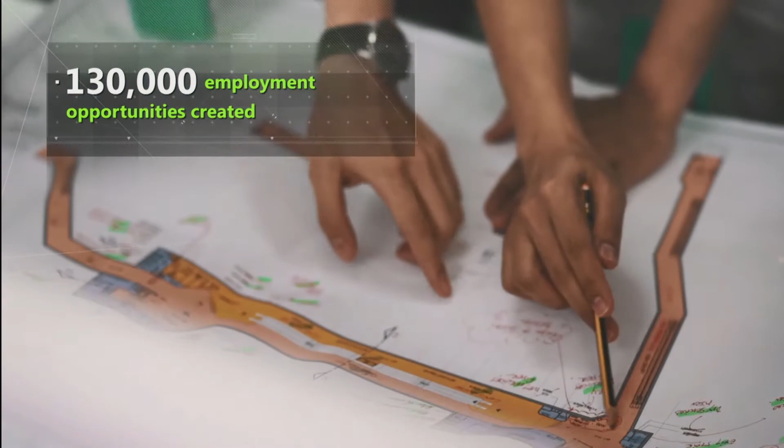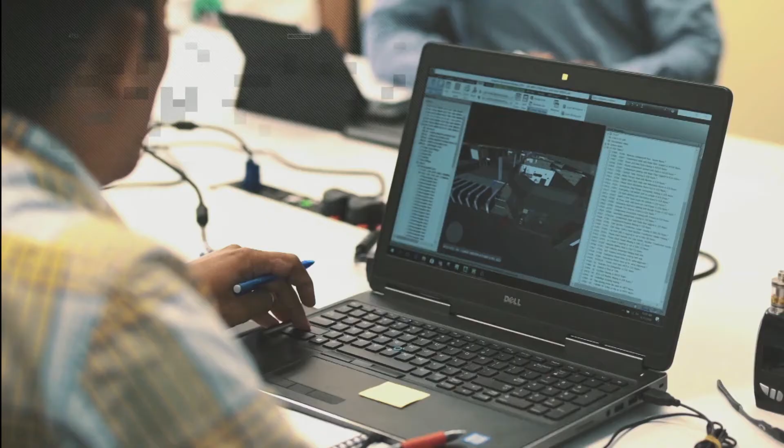The KV MRT system is providing a major boost in the integration and efficiency of urban public transport. The country's largest infrastructure project is already having a significant economic impact in Malaysia and within the region. As the first metro project in Asia Pacific to ensure greater collaboration and efficiency across teams with building information modelling, or BIM, methodologies, the SSP line is expected to be delivered on schedule and on budget.

Taking advantage of digital technologies for its SSP line, MRTC is improving connectivity for local and regional businesses, expanding workforce skills, attracting international investment, and increasing property values across the Klang Valley region. Digital transformation is helping transform the lives of millions of Malaysians today in preparation for a better tomorrow.

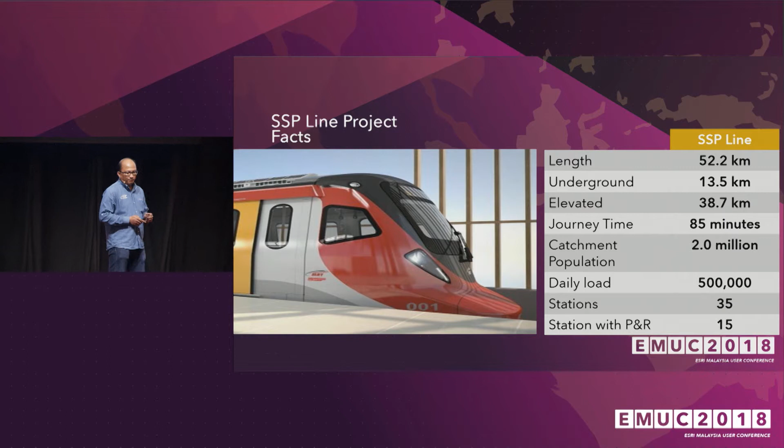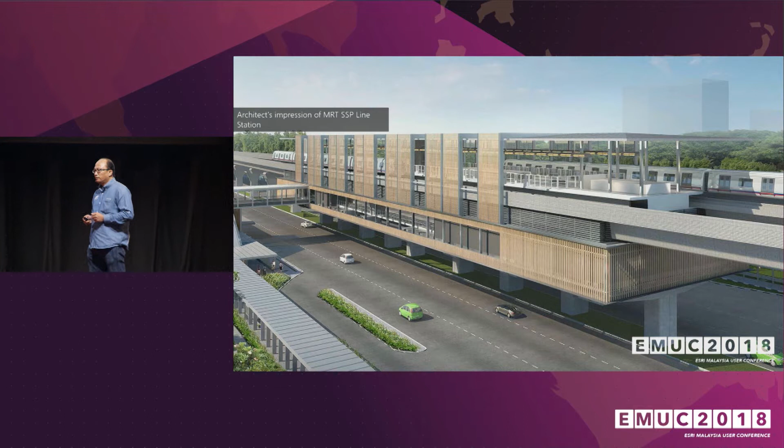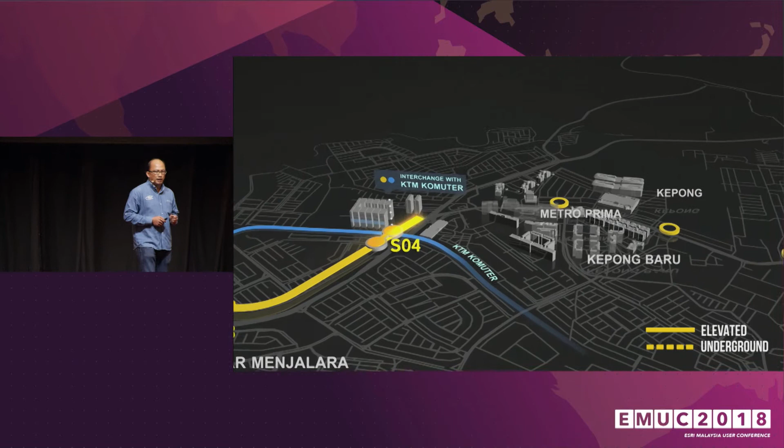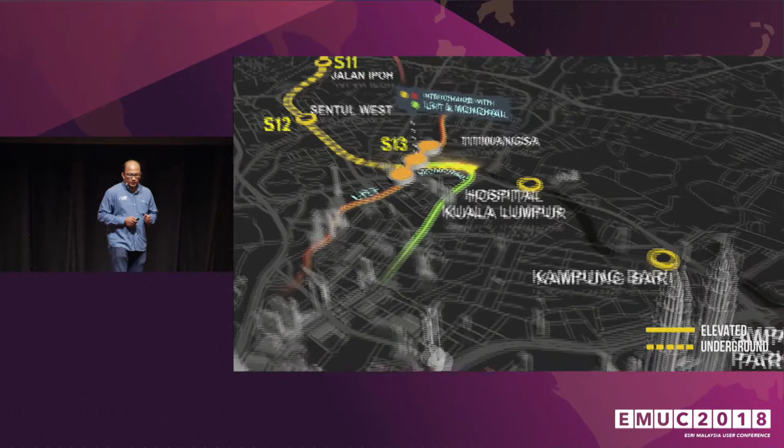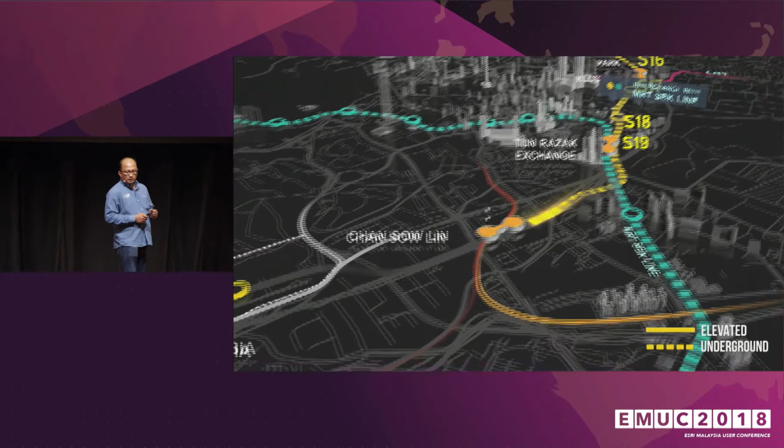The SSP line will start from the existing Sungai Buloh depot and will pass through the residential areas in the northwest of Klang Valley. This will include residential areas such as Damansara Damai, Kepong, Jinjang, and Jalan Ipoh. Once it reaches the city center, the train will start going underground from Sentul West, going to Titiwangsa, Kampung Baru, Ampang Park, KLCC, Tun Razak Exchange, Chan Sow Lin, and back to the elevated alignment at Desa Water Park

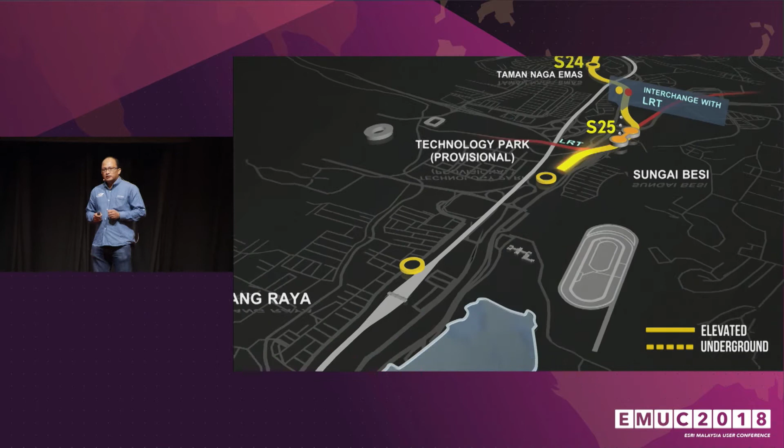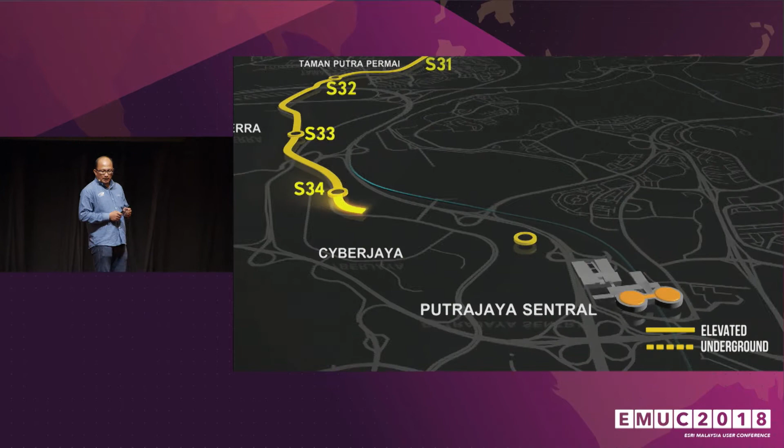near Jalan Kuchai Lama. The line will continue toward the southeast of Klang Valley, which will pass through residential areas such as Kuchai Lama, Serdang Raya, UPM, Seri Kembangan, our second depot at Serdang, before Equine Park, 16 Sierra, Cyberjaya, before terminating at Putrajaya Sentral.

The project has reached 40% progress of the underground construction and 30% of the elevated system. The operation of the SSP line will be in two phases. Phase 1, from Sungai Buloh station to Kampung Batu station, will begin operation in the second quarter of 2021, while the rest, from Kampung Batu station to Putrajaya Sentral, will be operated under phase 2 in the second quarter of 2022.

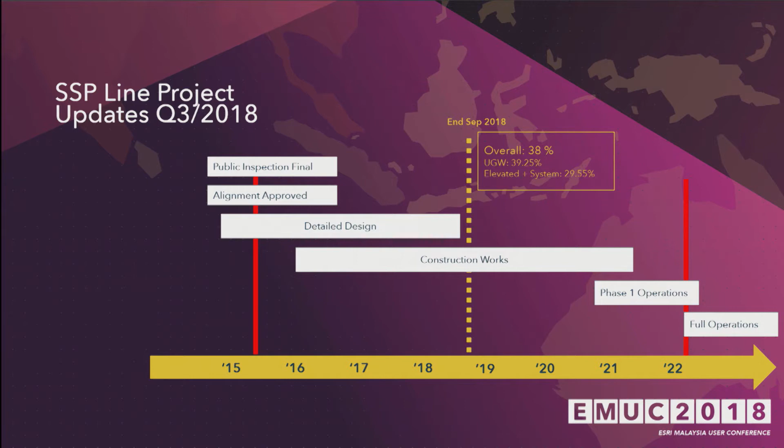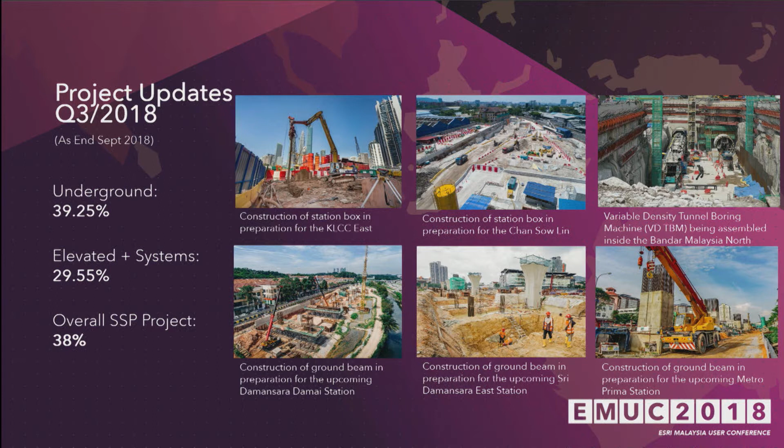These are some of the photographs of our construction progress. You can see we are currently constructing MRT stations near KLCC, Chan Sow Lin, and our tunnel boring machine launch site at Bandar Malaysia North, and some of the elevated stations at Damansara Damai, Damansara East, and the Metro Prima area.

Now, I would like to share some of the challenges that we have in this project. The MRT SSP line consists of 500 multidisciplinary professionals like architects, engineers, planners, geologists, and controllers. And these people are the heart of the MRT SSP line project. And we are responsible to deliver the SSP line project within budget and within time to the government of Malaysia.

Our work involved the design and construction of the SSP line underground, elevated guideways, depot, tunnels, and stations, as well as the electrical and mechanical systems required for a fully functional railway system.

It is very important for us to make the information available across the project accurately, up to date, and with no misinterpretation between the stakeholders. We need to ensure the design information, as-built information, and as-built validation are being managed and kept within the project, as the MRT structures and stations will have a long lifespan, which is 120 years.

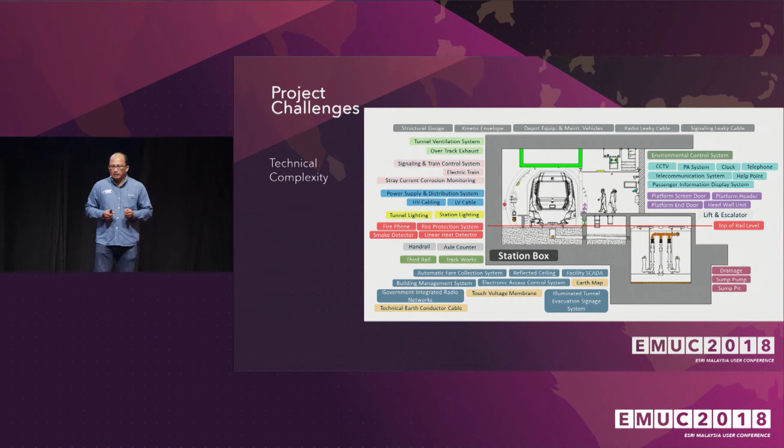Next is the technical complexity of the design. This illustration shows how complex it is to design and construct the MRT station. This involves cross-functional and multidisciplinary fields within a tight schedule. The engineering design information needs to be organized in a systematic and structured way so that it is easy to retrieve. The attributes also need to be updated correctly according to project classification requirements.

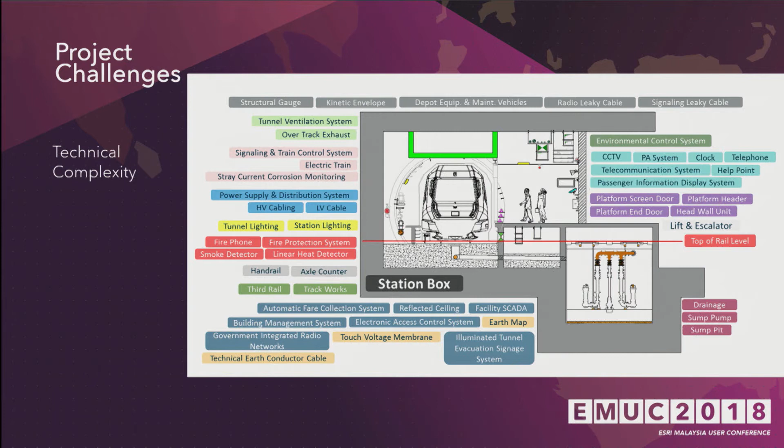To overcome these challenges, MRT Corp has embarked on a digital transformation program for engineering design and construction for this project. The main objective of our digital engineering program is to improve the SSP line project productivity by 35%. In order for us to achieve this, we are pushing 6 digital engineering initiatives into our project.

We are mandating the use of the BIM Level 2 framework for our underground and system work package contractors to carry out the design process in the Common Data Environment, or CDE, following the BS 1192 standard. We developed a GIS web portal to host all design and engineering information, utilities, as-built and construction models. We also utilize reality models using drones for site progress and monitoring. We are also using 3D laser scanning for BIM model validation and as-built scanning.

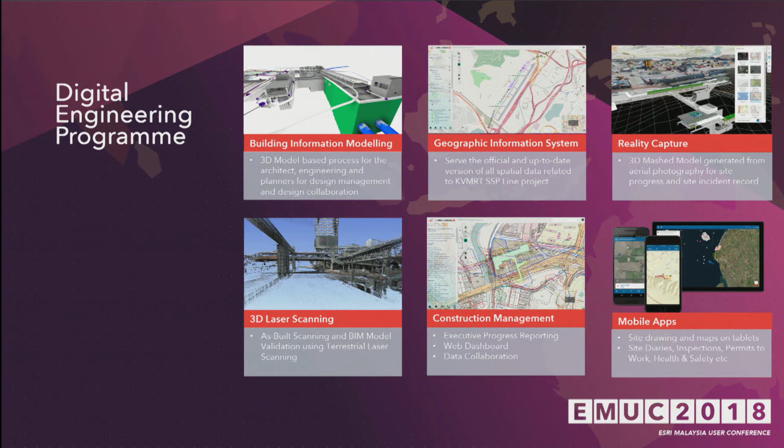Together with our contractor, we are pushing construction management to go paperless, mainly for inspection, dashboard reporting, and progress updates using smart apps. Next, I would like to showcase some of our work on how we have applied digital engineering in the design and construction of the MRT SSP line project.

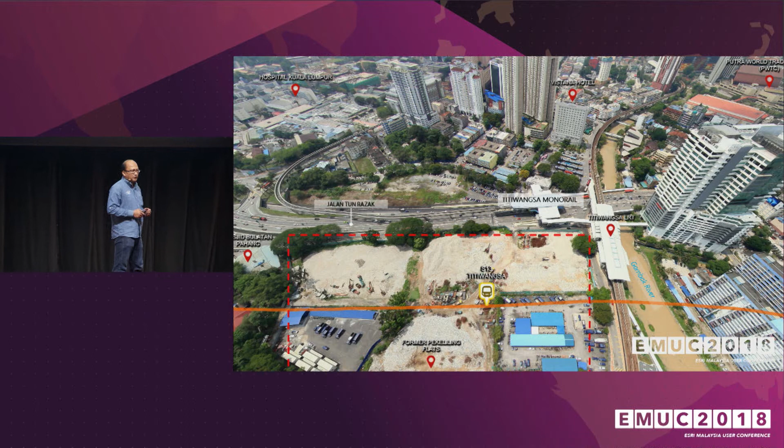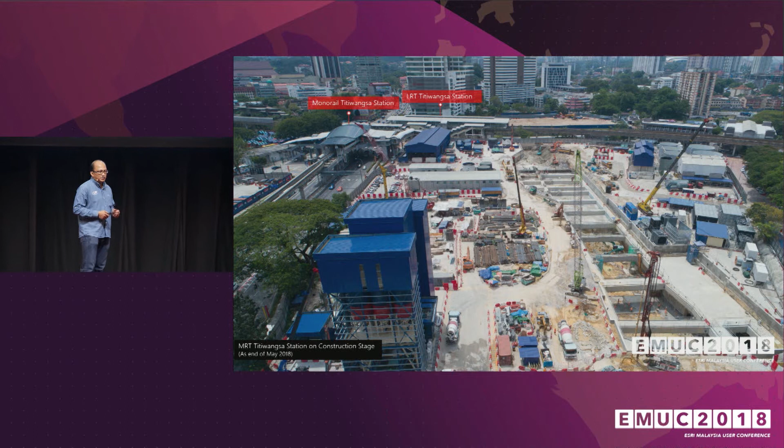For this demo, we have picked MRT Titiwangsa Station, which is one of our favorite stations. The MRT station is located beside Jalan Tun Razak near the existing LRT Titiwangsa Station and KL Monorail Titiwangsa Station. The MRT station is intended to be an interchange station that will be integrated seamlessly with the Ampang Line and KL Monorail Line. Now, let's have a look at the GIS implementation in the MRT SSP line project.

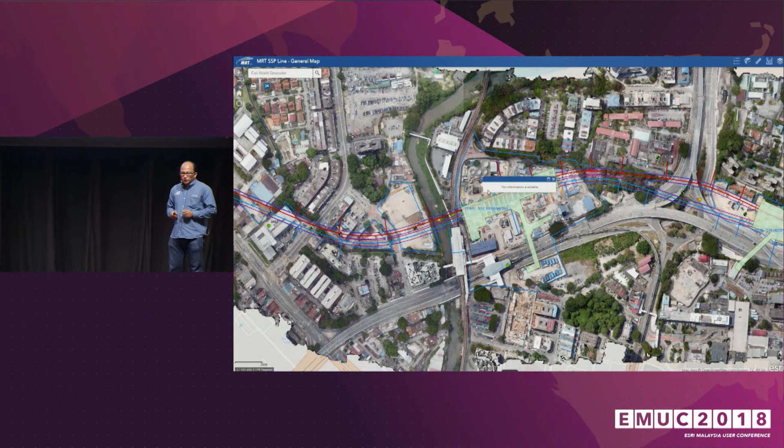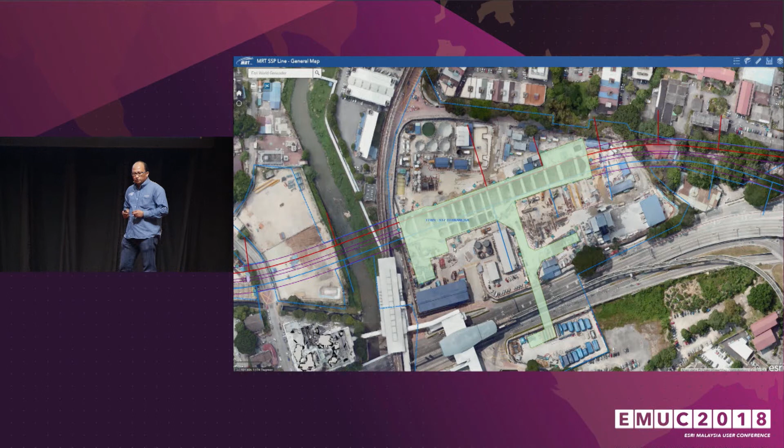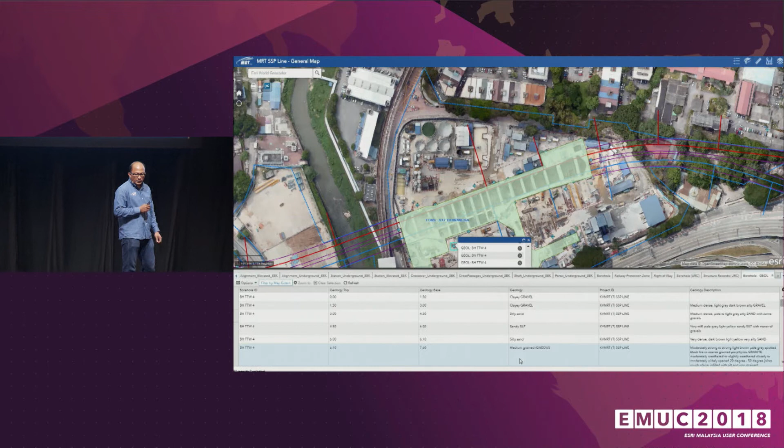For this project, our geospatial portal is using ArcGIS Enterprise 10.5. We are currently compiling all engineering drawings, spatial information, documents and records into a centralized mapping viewer. The video shows a collection of soil investigation boreholes that we have converted from AGS4 format from our geotechnical team. AGS4 is a text-based format and it contains detailed information about the soil profile.

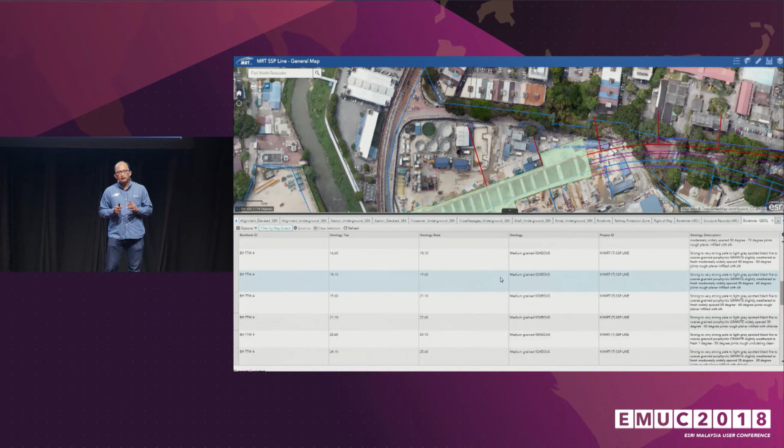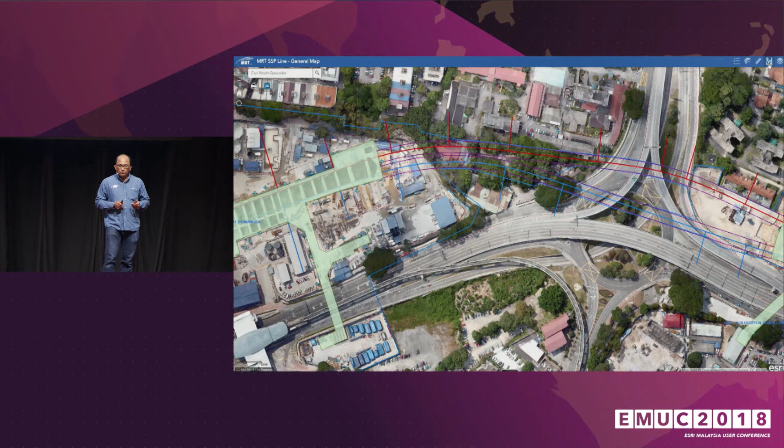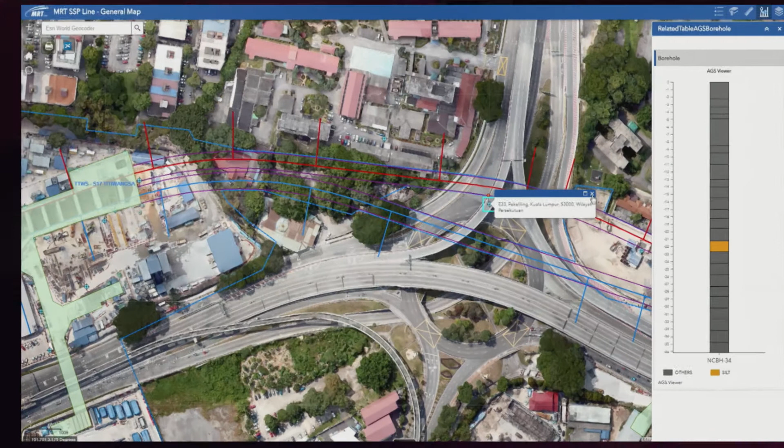In order for us to bring this data into a GIS portal, a special conversion tool has been developed. Now, our geotechnical engineers have the ability to see the borehole report together with the visual representation. We also created a widget to highlight the depths and the soil type of each borehole. It will provide a graphical representation of the soil depth.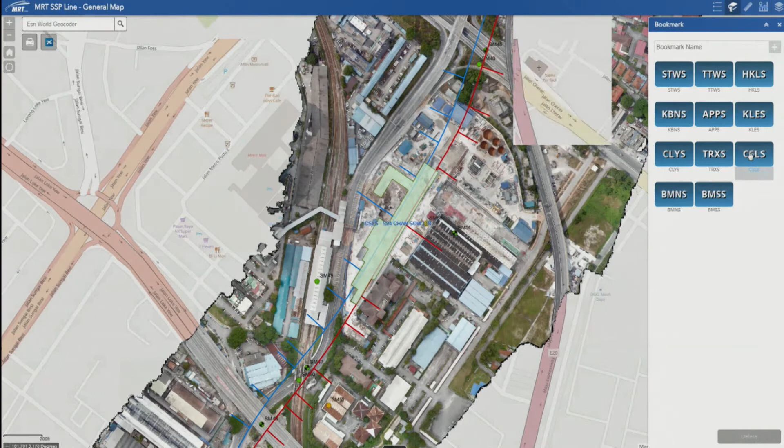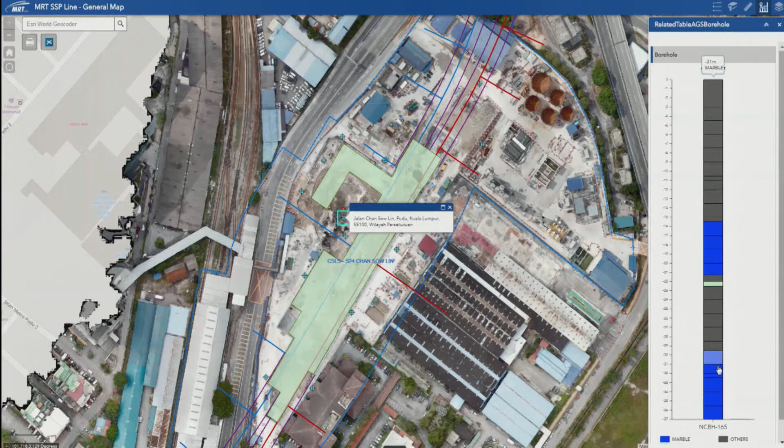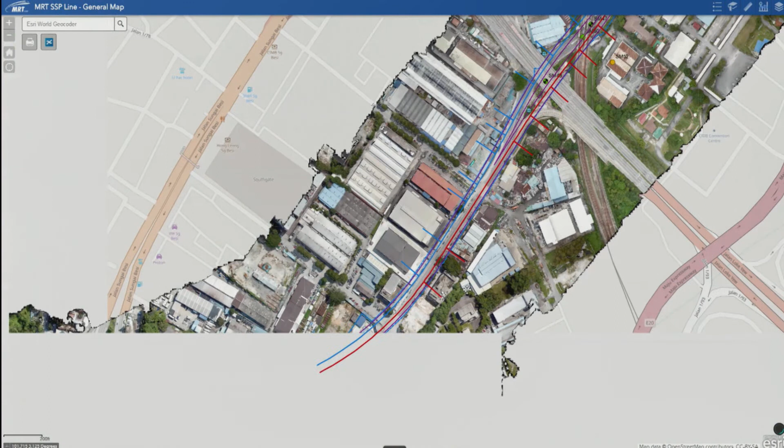Here is the video of a few boreholes in the customized widget viewer that highlights the soil profile and the soil depth in the ArcGIS portal. In addition to the compilation and presentation of the geotechnical data, we also created an API to interface with Leica Geosystems and tunneling software.

The purpose of this API is to map the tunnel progress every day in the GIS portal. So you can see here, information like tunnel position and ring progress is being tracked daily in the GIS system.

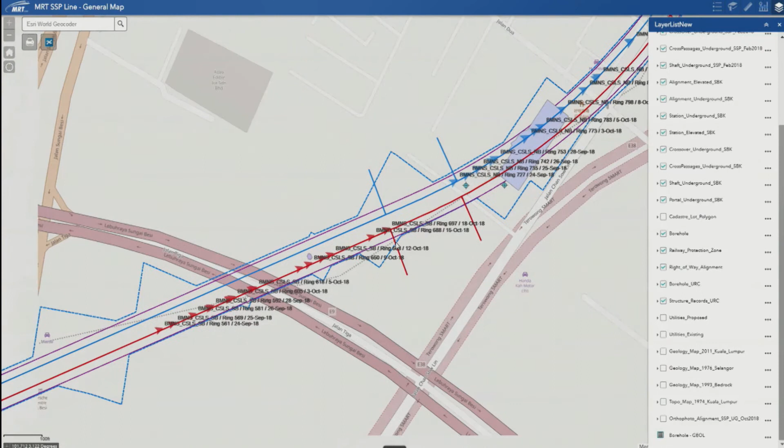For this project, MRT Corp has moved from on-premise server to cloud-based server implementation, which provides better reliability and availability of all our project data. We are adopting Microsoft Azure Cloud for both GIS production and development servers.

These servers are fully interfaced with KVMRT CDE, and we are also replicating both servers in cloud and on-premise to backup and protect our project data. We are also proud to share that we are the first project in the Asia region to have ArcGIS Server Enterprise

on full cloud configuration implementation. Next, I'm going to share things that keep us busy every day, using GIS data with BIM and Reality Model for this project.

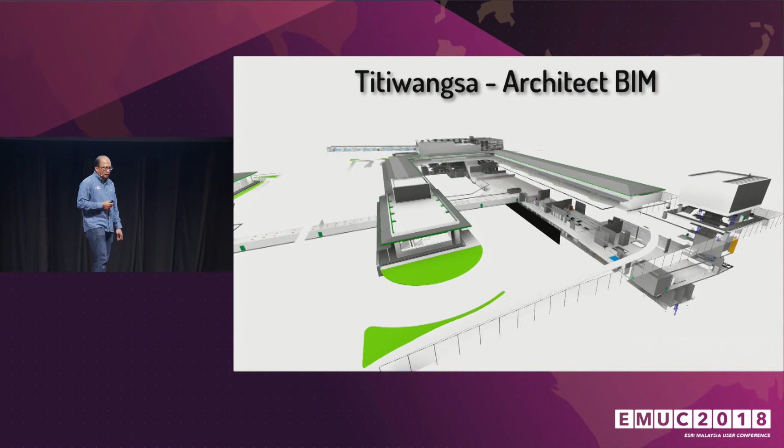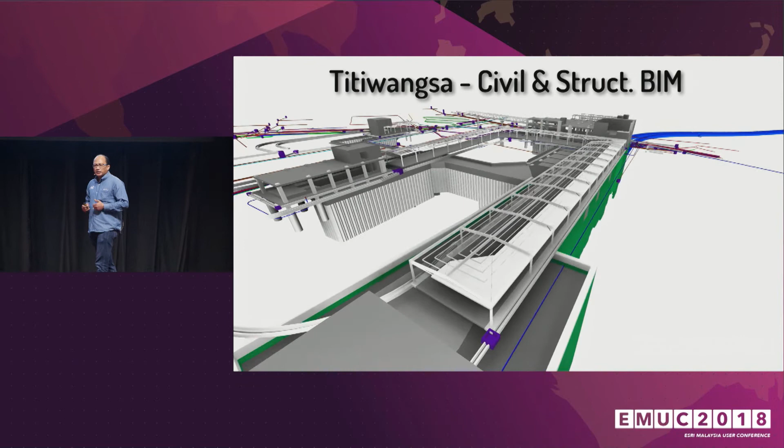The SSP line is one of the first in the Asia region and among very few in the world to implement BIM Level 2 for an infrastructure project of this scale and complexity. This model demonstrates the station design complexity in 3D, and it allows our engineers to visualize, collaborate, and analyze every aspect of engineering in a virtual world for design and construction process.

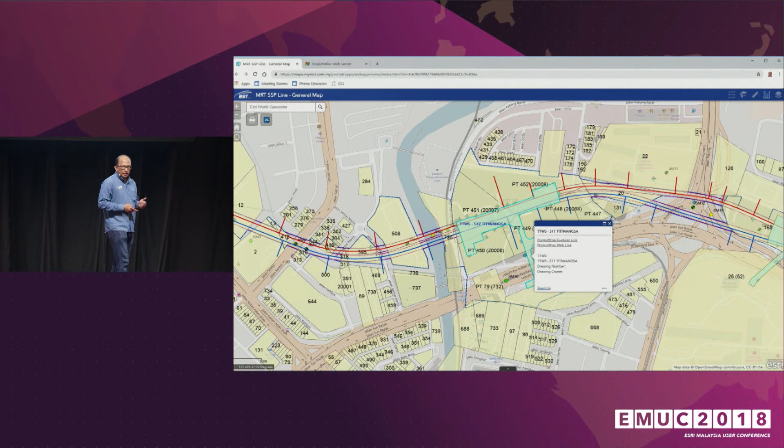To help our engineers retrieve the Titiwangsa model quicker, faster, and more intuitively, we have interfaced our GIS portal with project CDE infrastructure directly in the cloud. Engineers can retrieve this model directly using a viewer with simplified interface pop-ups and attributes linked to the models using ArcGIS Pro. This is the 3D model being retrieved from ArcGIS Portal in 3D modeling software.

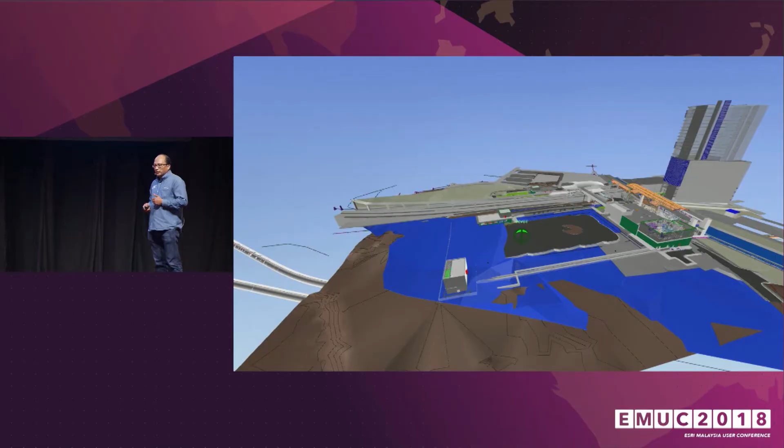We are also pushing the boundaries and setting up benchmarks in various aspects of project development. Among them is the use of reality modeling. Reality modeling is a combination of drone imagery and reality mesh software.

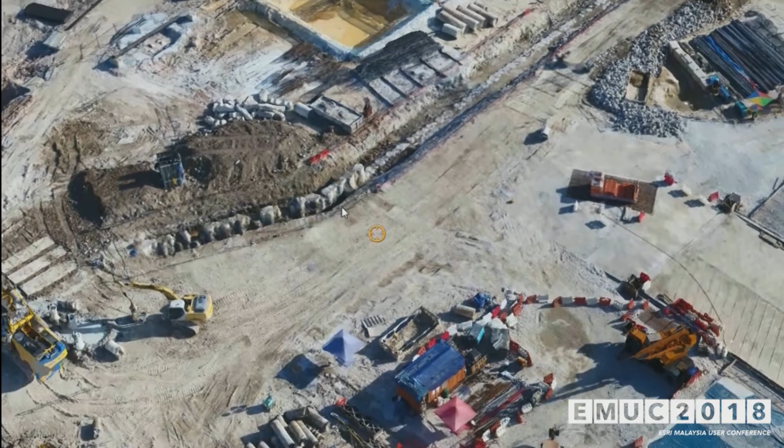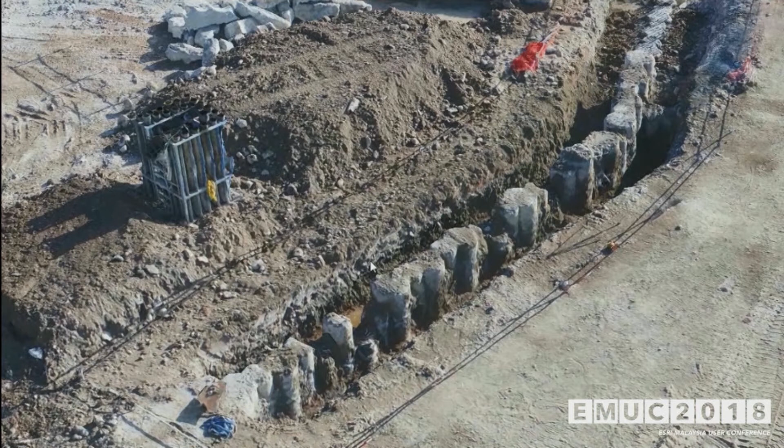These outputs are being used by our engineers to review the current progress at site, conduct visual inspection, perform measurement, and review stockpile volume. What you see here is reality modeling of Titiwangsa Station and the detailed construction progress.

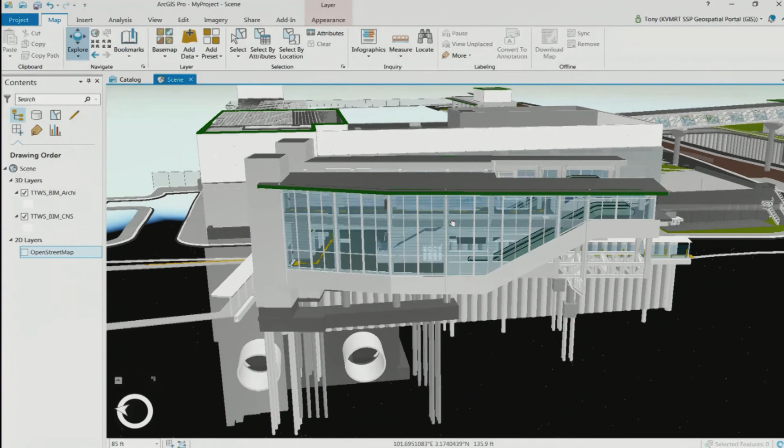We have a monthly program to capture reality modeling for all our underground sites. The scene layer output in Esri i3S format is being reviewed, compared, and fused with the BIM model in ArcGIS Pro before we publish the unified model into the 3D scene viewer.

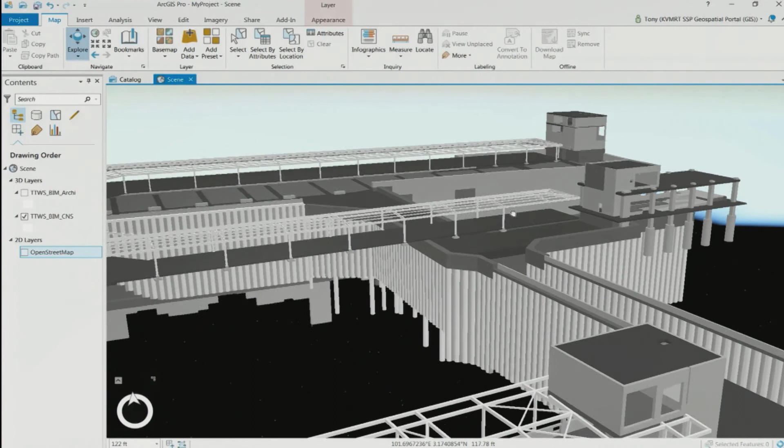This video shows the monthly routine by our GIS engineer reviewing the construction progress using the BIM model and the latest reality model in ArcGIS Pro. Once the 3D model is ready, ArcGIS Pro will be able to fuse the models into one unified model before publishing into the Esri 3D web scene.

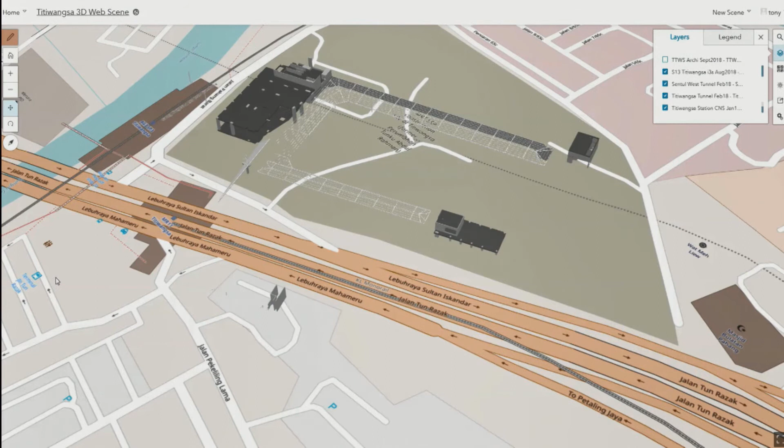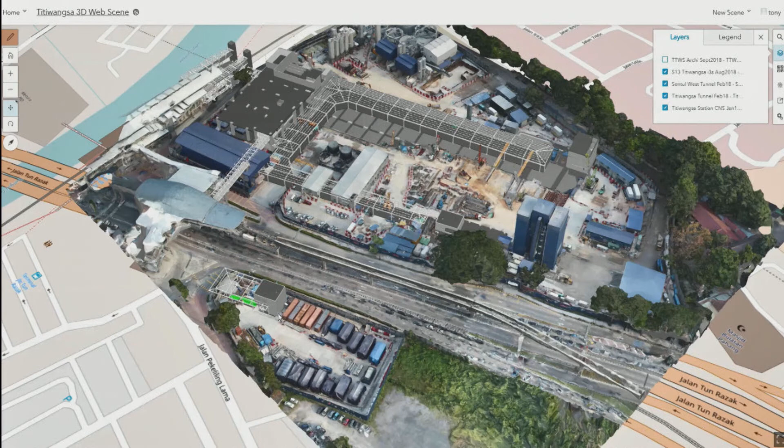We host the unified reality model in our GIS portal for our project team to access and see the site progress virtually on the cloud. The 3D web scene enables us to fuse multiple types of information, such as street map, aerial photography, 3D model, and reality model, into a unified 3D viewer.

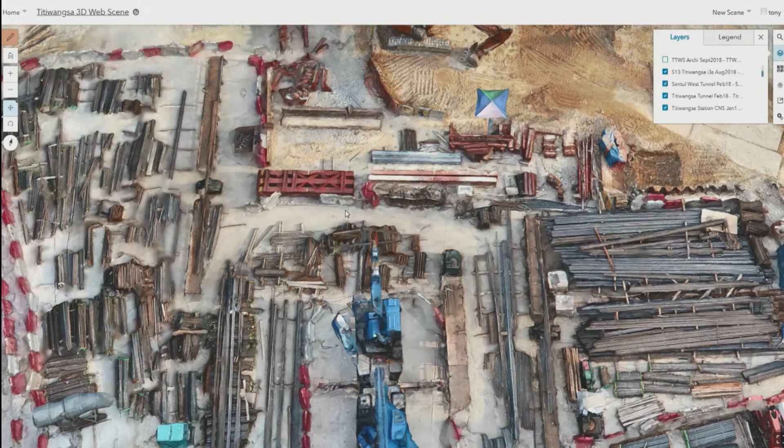Our project manager, site manager, construction manager, and project planner are heavily using this viewer from the site office and design office to understand the site context, review site progress, and inspect site incidents.

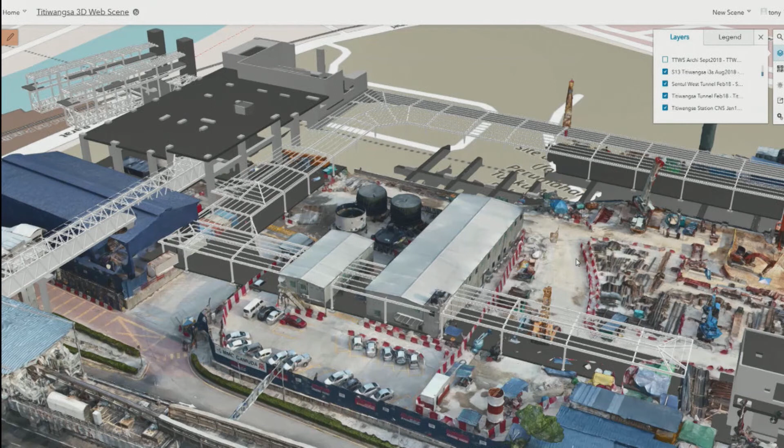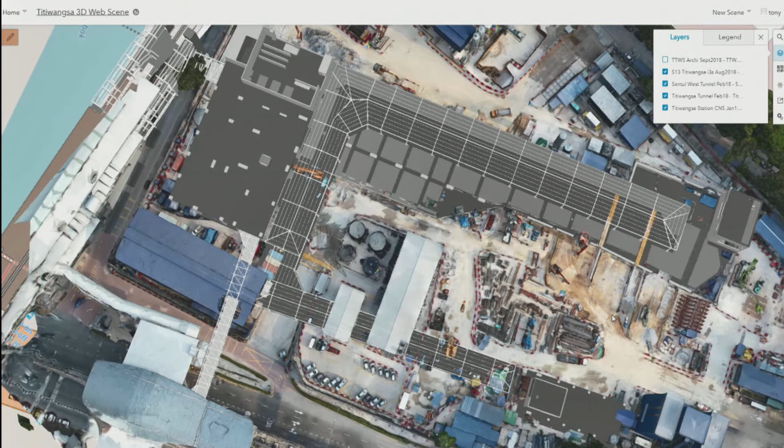In this video, you will see all engineering designs from the BIM model that are being published into the 3D web scene viewer. The BIM models are the architecture models, structure models, and tunnel models.

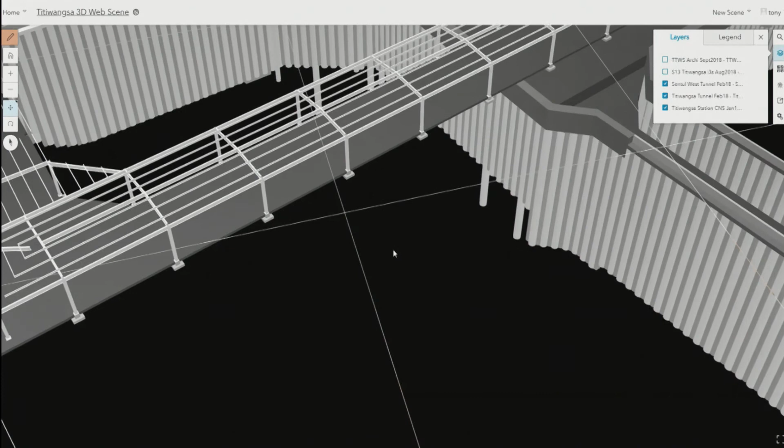It is very detailed and very complex. Not just models - we also bring the attributes and classification from the BIM model into this viewer. The attributes help our project team to understand the full context of their reviews.

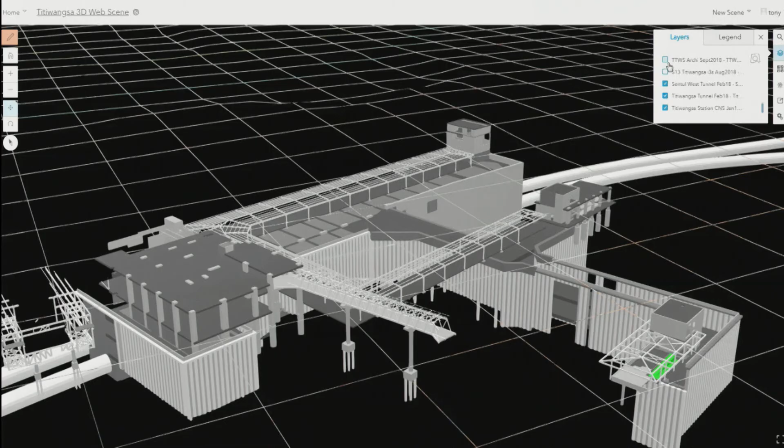Our journey does not end here. We are continuously harnessing the power of ArcGIS technology for our corporate GIS applications. We are currently developing a comprehensive GIS database for our development and building control team, which will contain MRT SBK line information, engineering drawings, and electronic plans.

We are also testing Collector and Survey123 apps as our field mapping and data capturing tools for our engineers to monitor encroachment, zone violation, and illegal activities in the MRT railway protection zone.

We are also developing a land management database using ArcGIS Online for our land management team to capture all land-related information, valuation, legal records, correspondence, and including financial data.

And finally, we are looking at ArcGIS Analytics to help us understand our feeder bus ridership patterns and trends, and later address our last mile connection issue.

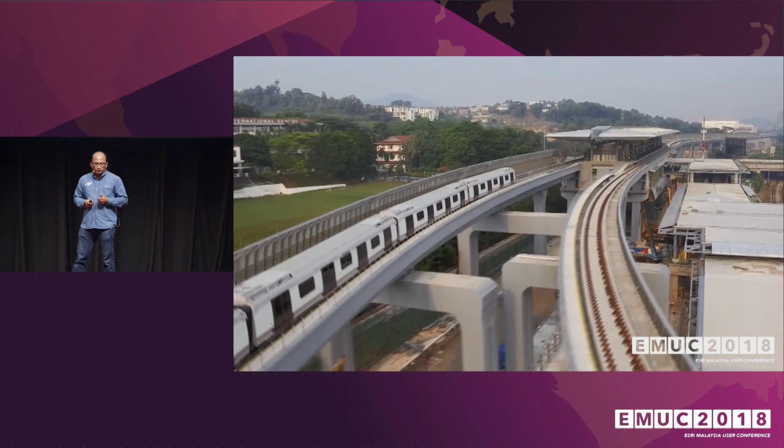Now we have come to the end of the presentation. I hope you have gained new knowledge on how MRT Corp has utilized digital engineering in the SSP Line project. Thank you for your attention, and I look forward to seeing you on board an MRT train soon.